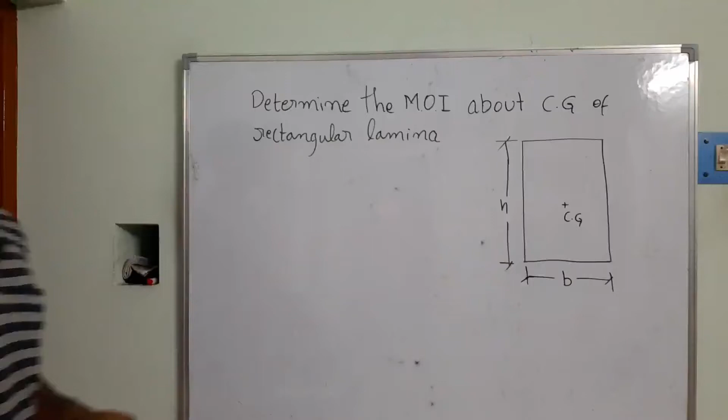In this video lecture, we are trying to learn the moment of inertia for a rectangle lamina. The moment of inertia here is taken for the area, and we know that resistance develops against bending forces. Suppose a body is subjected to bending forces, like a circular member subjected to bending in a certain direction. The cross-section area tries to resist the bending forces. Most of the time, whether it's deformation or deflection of the members, we calculate it using the area moment of inertia.

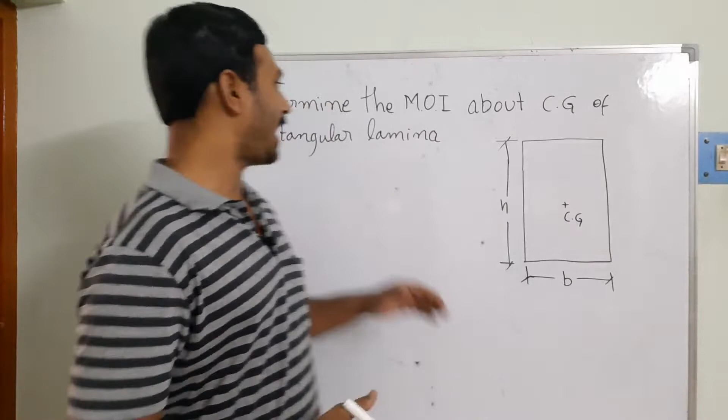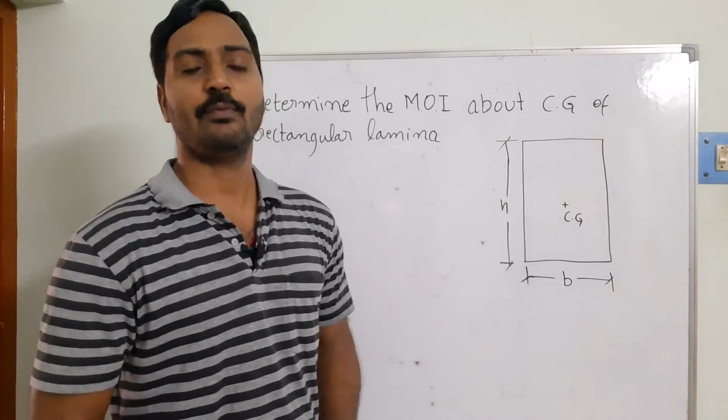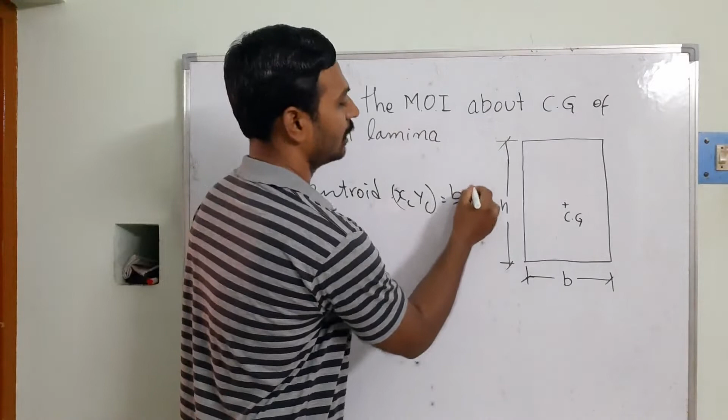In this diagram, we have a rectangle lamina available. The base is B and the height is measured as H. As we calculated the center of gravity in the last video lecture, the centroid of this rectangle lamina, XC comma YC, is equal to B by 2 comma H by 2. On that basis we calculate the centroid.

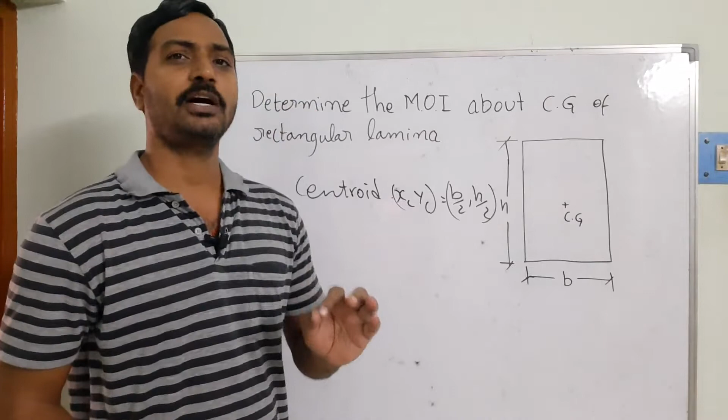Once we calculate the centroid, we need to calculate the moment of inertia with respect to the centroid. So I'm taking the axes over here: this is your X axis and this is your Y axis. Can you see the centroid? Your observation axis is passing through the centroid, both XX and YY.

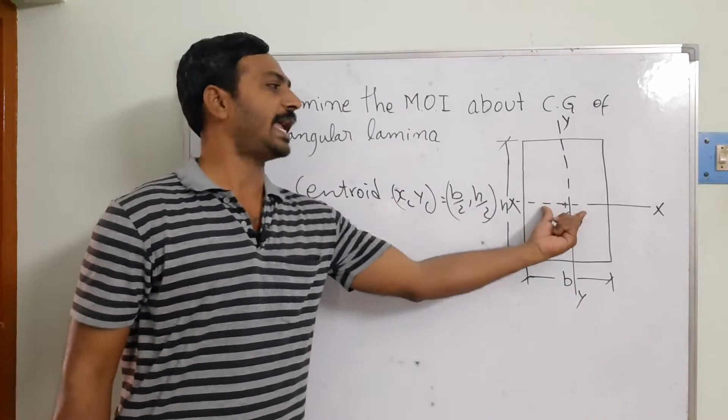Now I want to find the moment of inertia with respect to the X axis. This means, with respect to this axis, how this area is distributed. When it is subjected to a certain type of force, we need to calculate how this area resists the change.

So I'm taking the moment of inertia of this object with respect to the X axis. That is equal to the formula integral y square dA. In this equation, we need to find dA, and for this we first need to find the elemental strip.

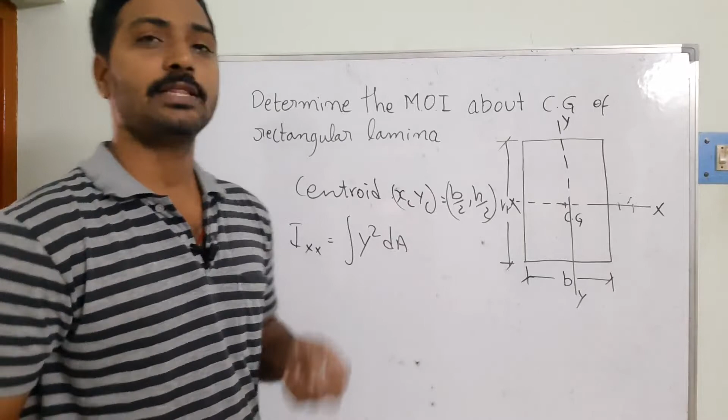The elemental strip is taken parallel to the x-axis. So this is the elemental strip, having a thickness of dy. At the same time, the width of this strip is the same as the base.

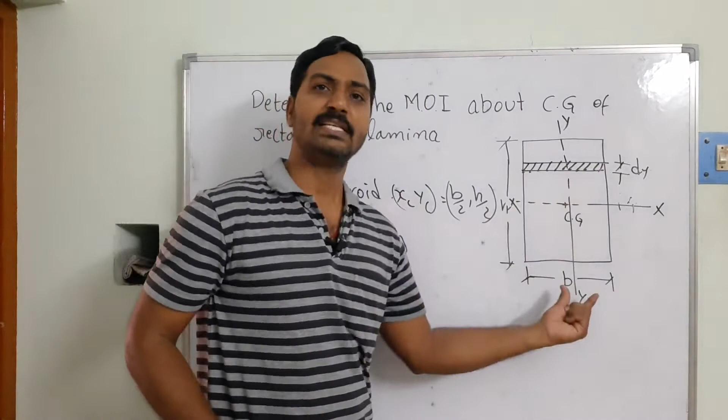So dA, the elemental area, is equal to B into dy.

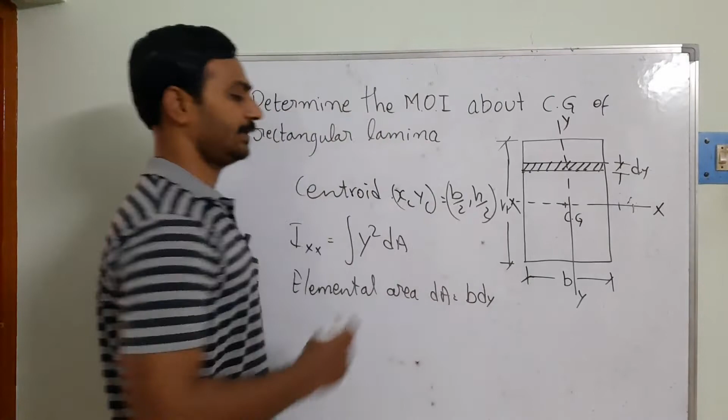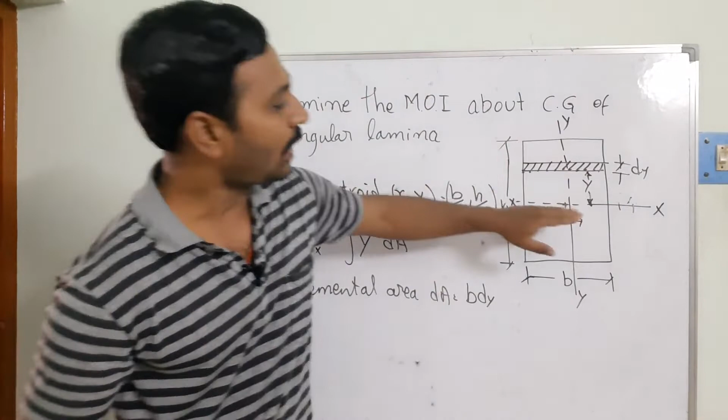At the same time, it is located at a distance of y from the observation axis to the elemental strip. Since the elemental strip is taken above the axis, and the total height is H, y is distributed above and below the reference line. So the limits are minus H by 2 and plus H by 2.

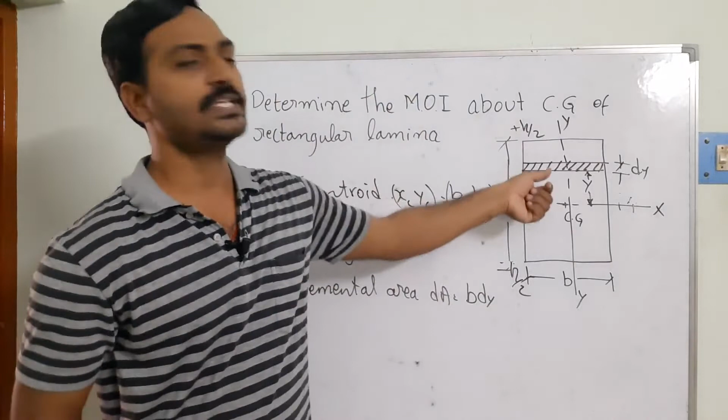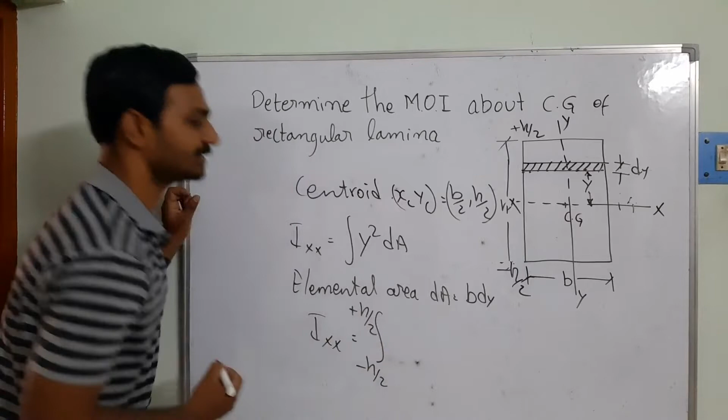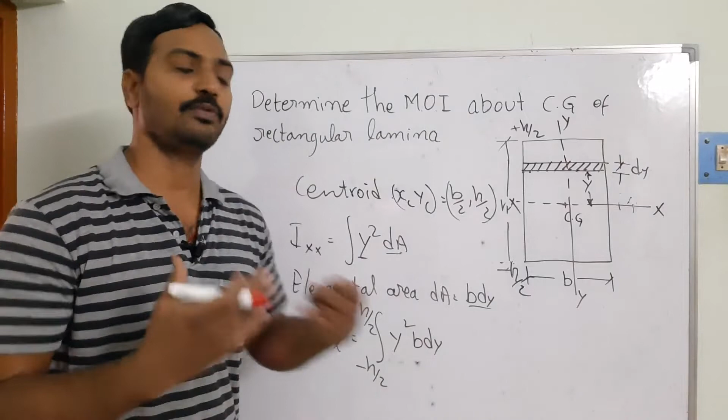Now I'm finding the moment of inertia of this elemental strip. So the equation is: Ixx is equal to the integral from minus H by 2 to plus H by 2 of y square into dA, where dA is replaced with the elemental strip, B into dy. Once we substitute this into the equation, we need to simplify it further so that we can find the resistance area for the bending forces.

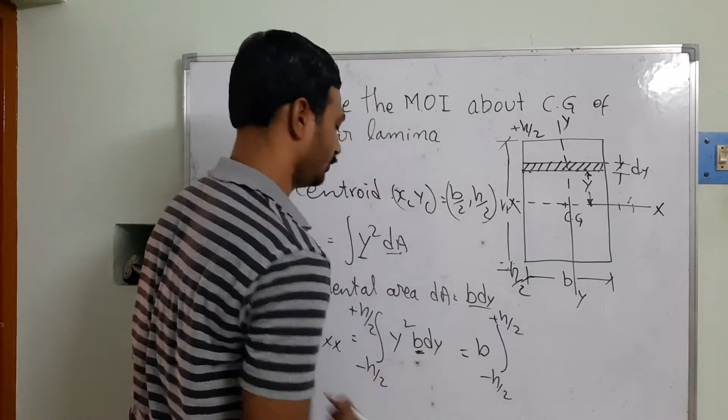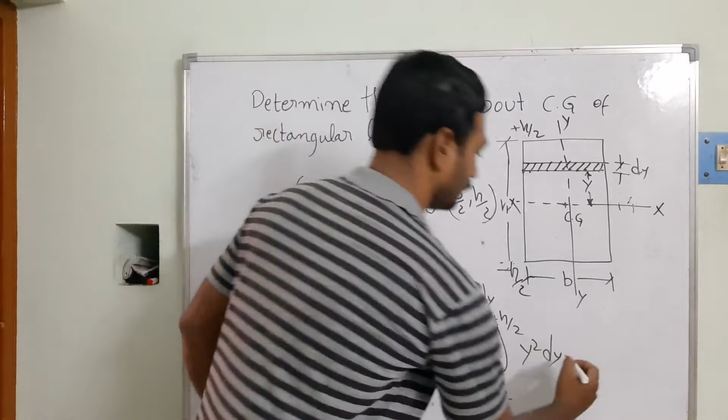So B is going to be constant in this equation, that's the B I am going to take out, and the integral is from minus H by 2 to plus H by 2, that's going to be y square dy we will get it. So from this I am going to be getting B into the integral of y square dy, which gives us y cube by 3.

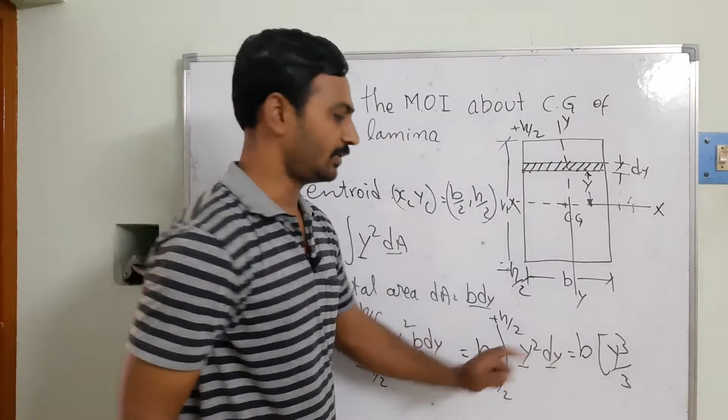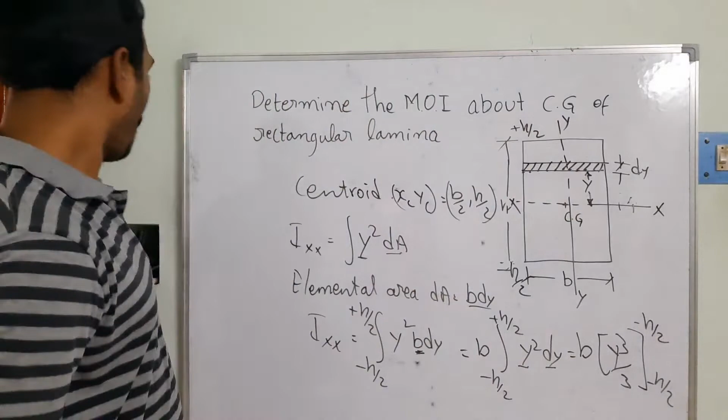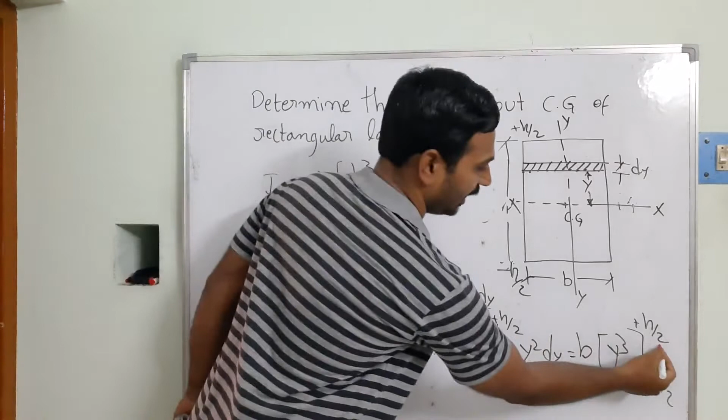So the intervals are going to be varying from H by 2 to minus H by 2. If I substitute these intervals in this equation, I am going to be getting Ixx is equal to B into, so the first interval is plus H by 2, that's going to be H cube by 3 into 8, minus of minus H by 2, whole cube by 3.

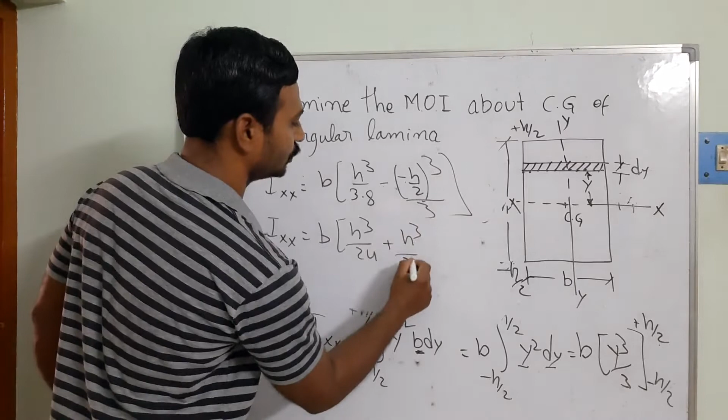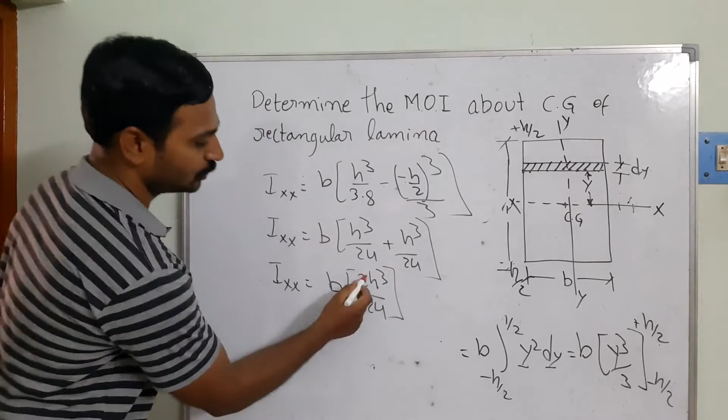Once I simplify this equation, Ixx is equal to B into H cube by 24. Minus minus will become plus, so here is going to be plus H cube by 24. In this case the LCM is going to be the constant, so Ixx is equal to B into 2H cube by 24. Then the 2 divides with the 24, so Ixx is equal to BH cube by 12.

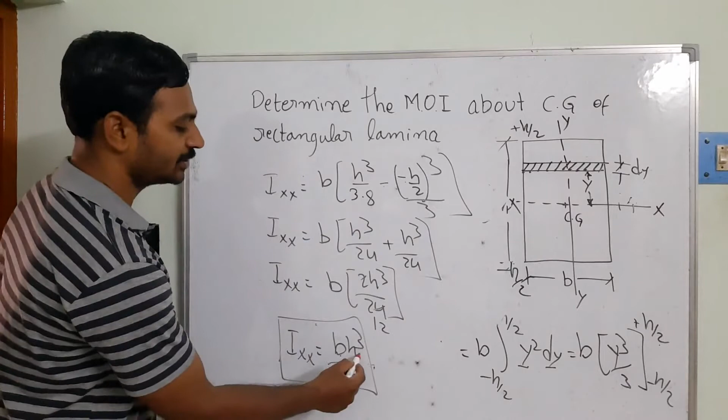So this is the amount of the area where it is going to be resisting the bending forces. Ixx is equal to B into H cube by 12, we got it. I hope you are able to understand how to find the moment of inertia of an area with respect to the centroid. This one we have taken as Ixx.

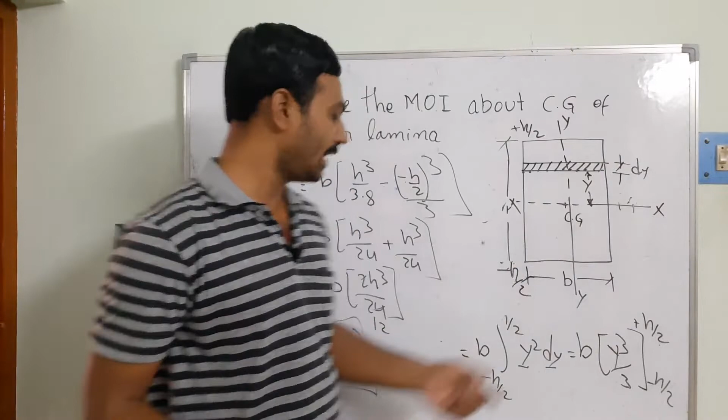Now we are trying to calculate the Iy. If you want to calculate the Iy, we need to take the vertical strip over here so that we can calculate that part.

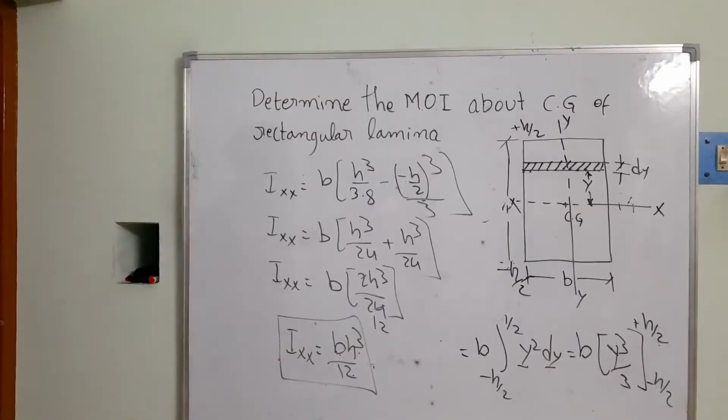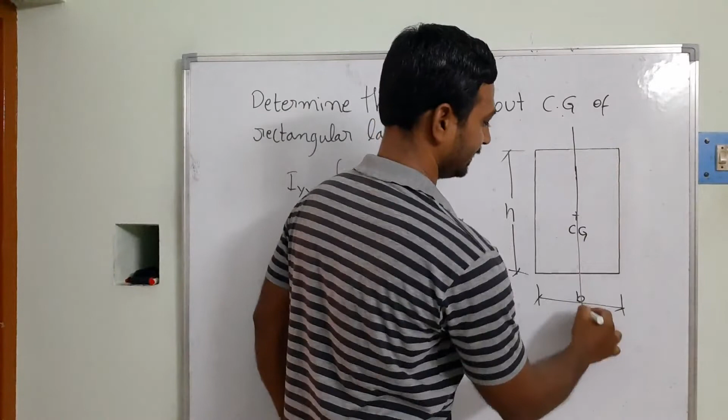Now we are going to find the moment of inertia with respect to the y-axis. Already we told that it is going to be passing through the centroid. So this is going to be your y-axis, and this is going to be your x-axis. Already we have calculated Ixx is equal to bh cube by 12, we have derived the equation. Now I want to find out the Iy, that is equal to integral x square dA.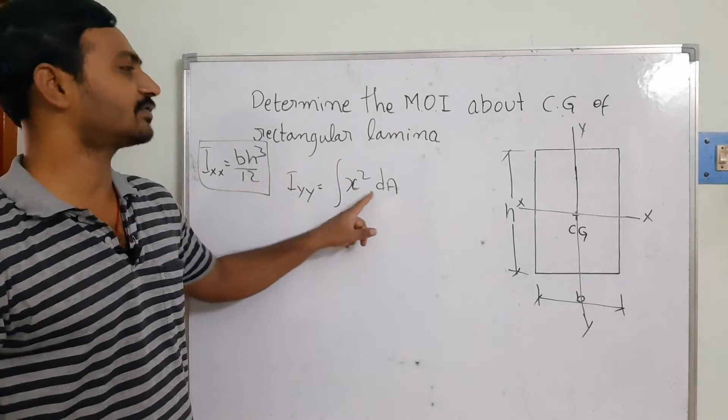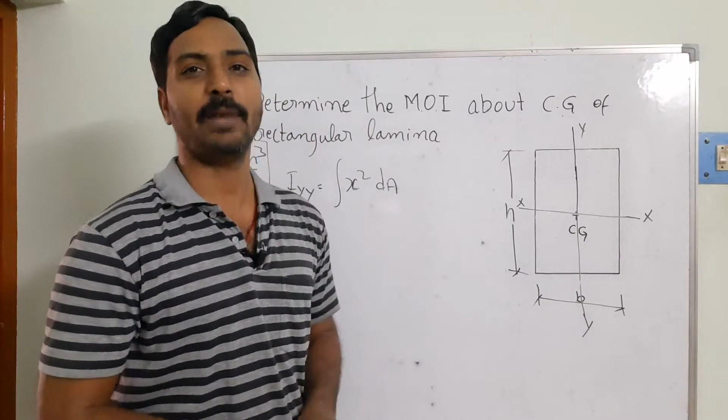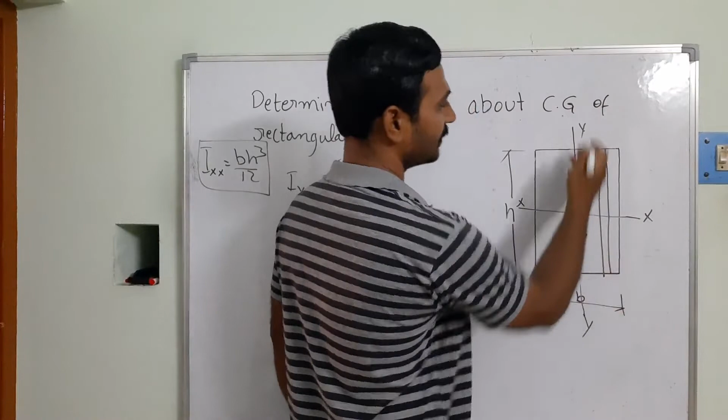To satisfy these conditions, first I am going to take, with respect to this axis, how the area is distributed and how it applies resistance to the bending force. So then I am going to talk about the dA here. The dA is equal to, I am going to take one elemental strip which is parallel to the observation axis. Here your observation axis is the Iyy. So this is your observation axis and this is your dx. So the elemental strip is going to be the dx, and it is located at a distance of x from the y-axis we have taken.

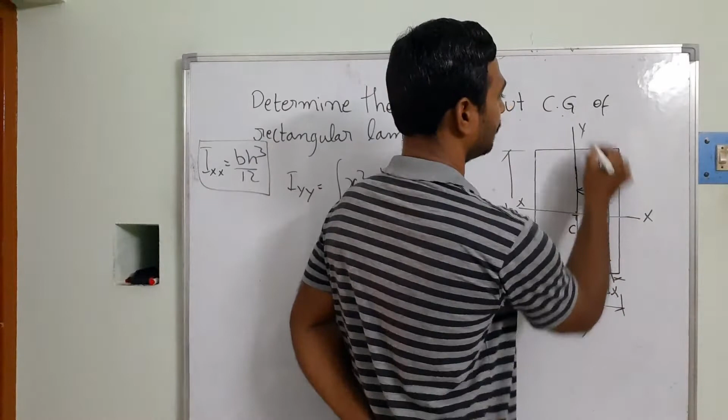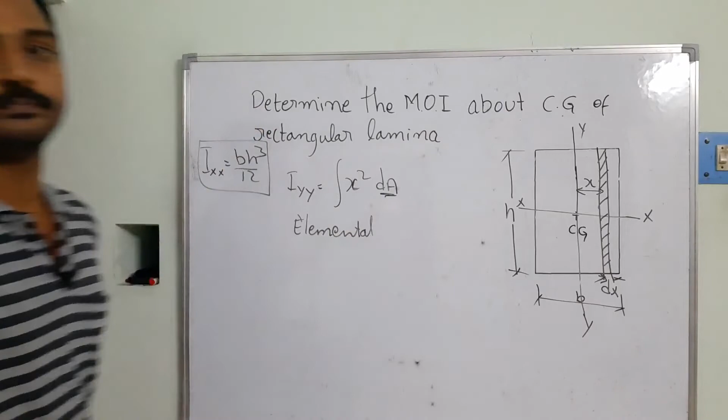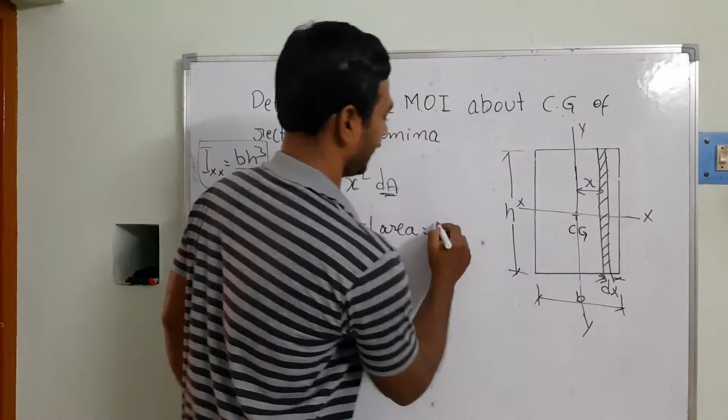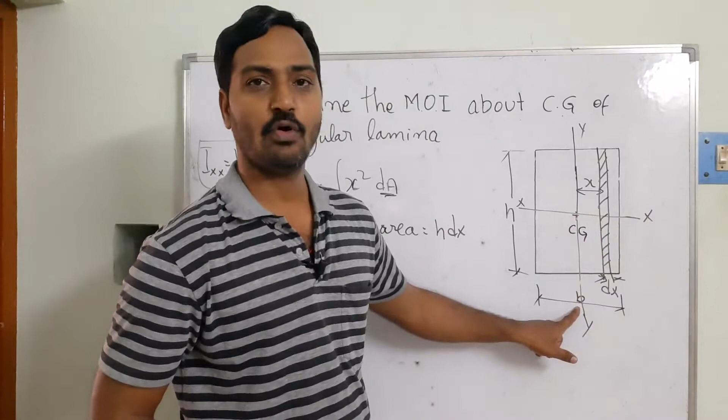Now I am going to find the dA, the elemental area. So here that elemental area is equal to, now in this case it was spread along the length direction, and this is going to be the dx, so I am taking h into dx. Can you see here, the x is moving from the centroid towards the right side and towards the left side. It means that we are using the b coordinates here. So towards the left side is going to be minus b by 2, and towards the right is going to be plus b by 2.

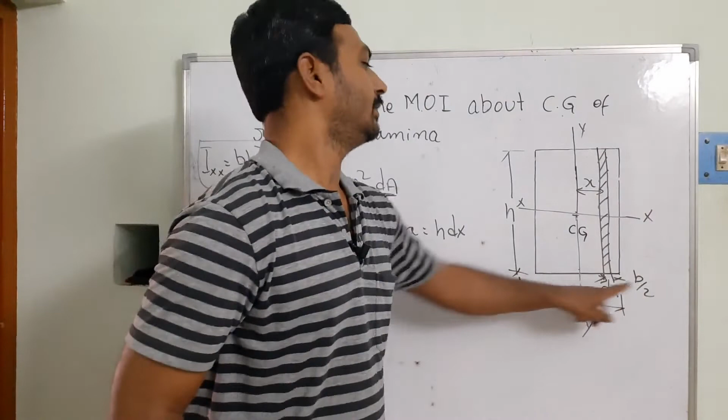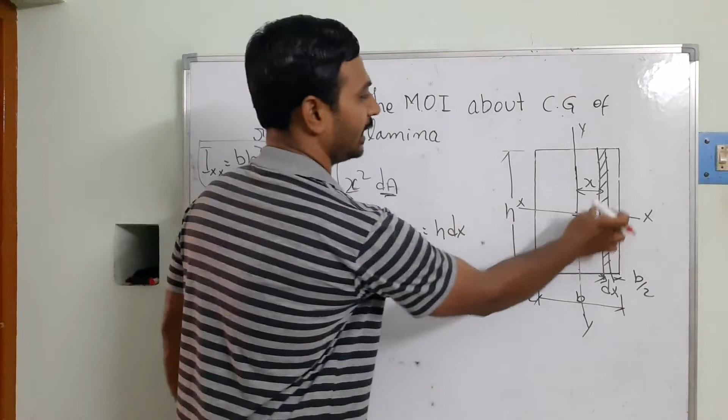So these limits I am going to substitute in our equation. That's going to be Iyy is equal to integral, from minus b by 2 to plus b by 2, of x square, since the element is located at a distance of x, and then the dA I am going to write as h into dx.

Now we are going to be trying to take the constant outside, so I am getting this. So that is equal to, h is going to be the constant, it is not going to be varying. So then your integration is going to be from minus b by 2 to plus b by 2, the limits, of x square dx. Further simplifying this equation, h into x cube by 3 evaluated from minus b by 2 to b by 2.

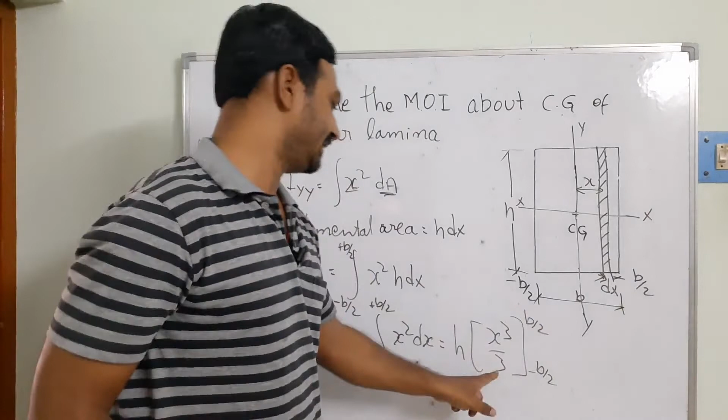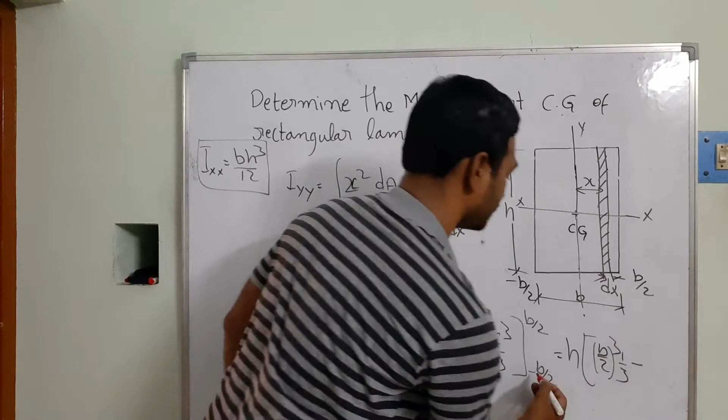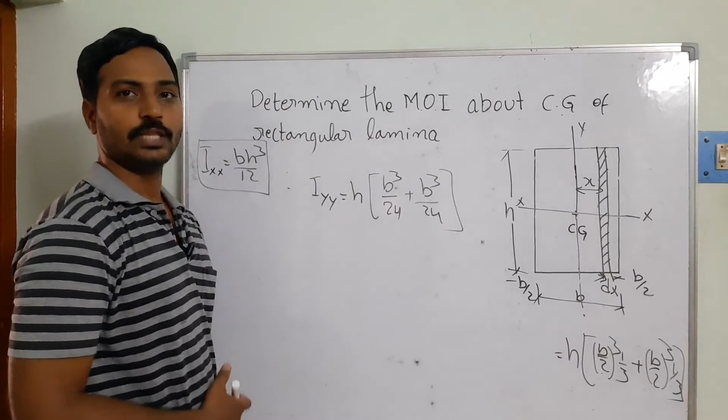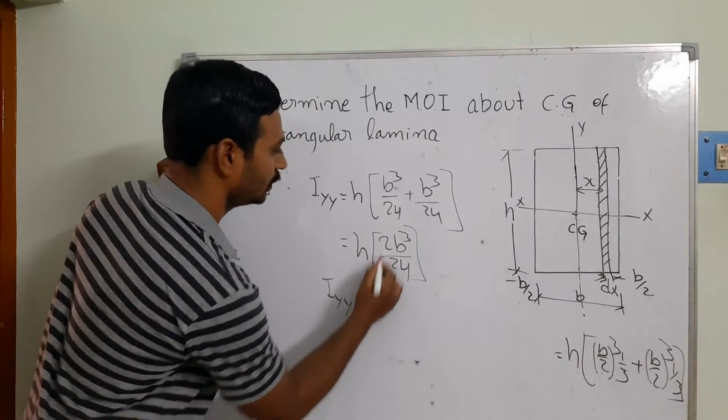So once I simplify that equation, we get Iyy is equal to h into b cube, and the 2 cubed into 3 gives 24. So plus b cube by 24 we are getting after simplification. Then we take the LCM here for simplification, that's going to be 2b cube by 24. So then Iyy is equal to, the 2 divided by 12 we are taking, that's going to be hb cube by 12.

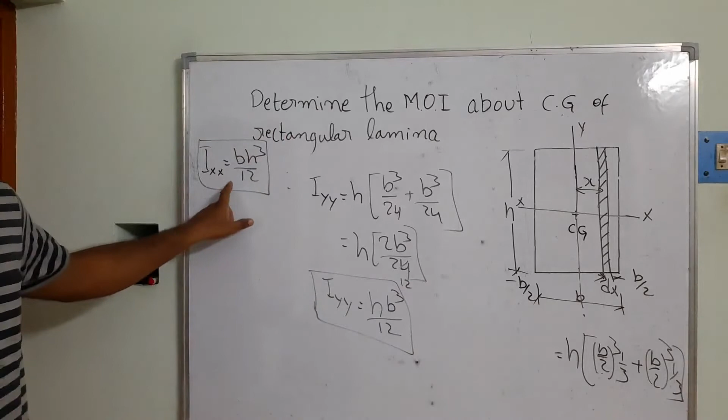We got it. So can you see, Ixx is equal to bh cube by 12, and Iyy is equal to hb cube by 12. So now this is the moment of area where it is going to start showing the resistance, which we will see numerically.

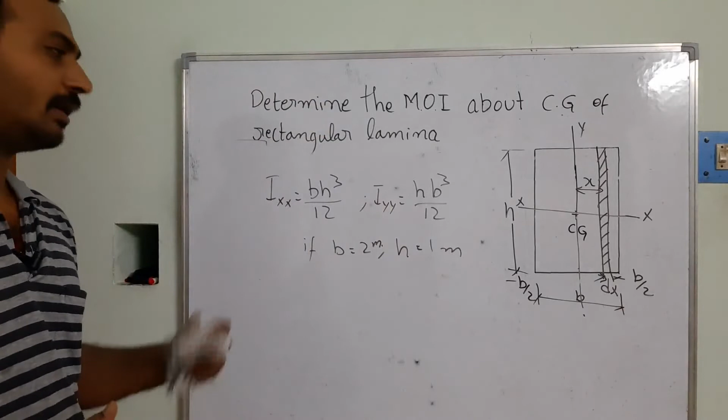So here I am going to be taking the dimensions of B and H. Suppose B is equal to 2 and H is equal to 1 meters, I have taken - either centimeters or millimeters or meters also we can take. For the time being I have taken this one.

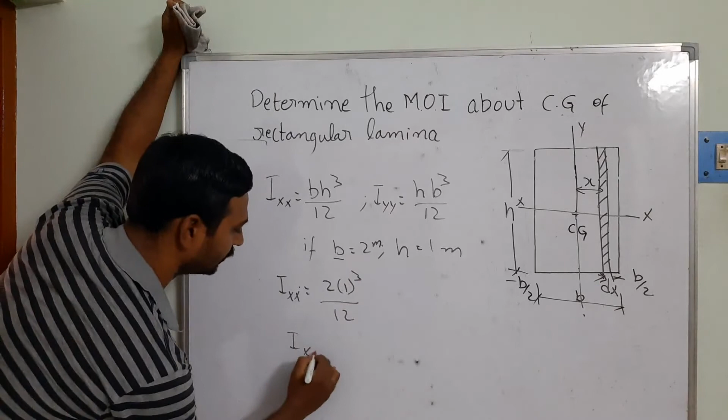So then what will happen? Ixx is equal to, what is the formula? B is equal to 2 and H is equal to 1 cube by 12 we are getting. So then from this, Ixx is equal to 1 by 6 meter to the power of 4 I am getting. So that means 1 by 6 only we are getting here.

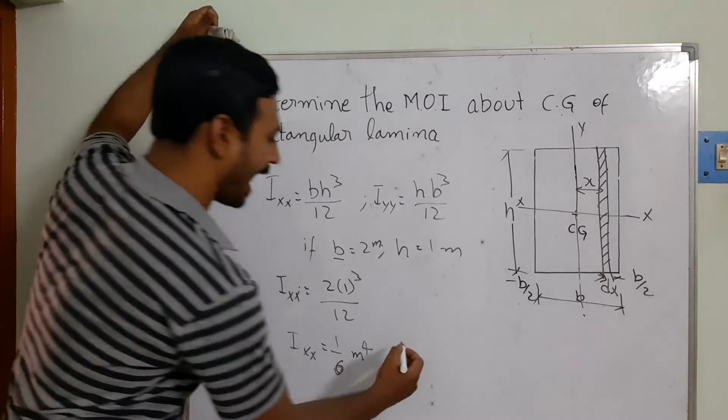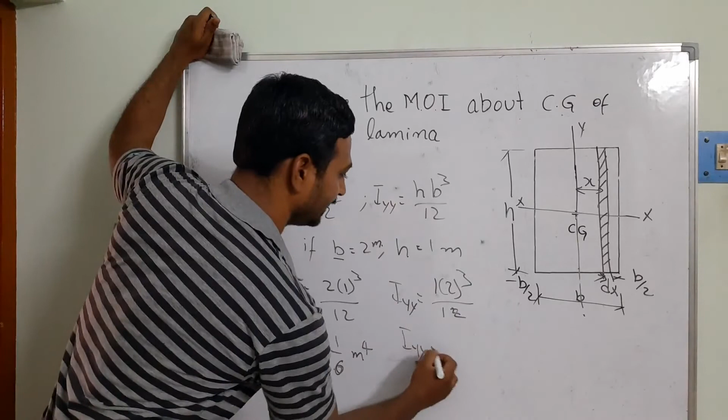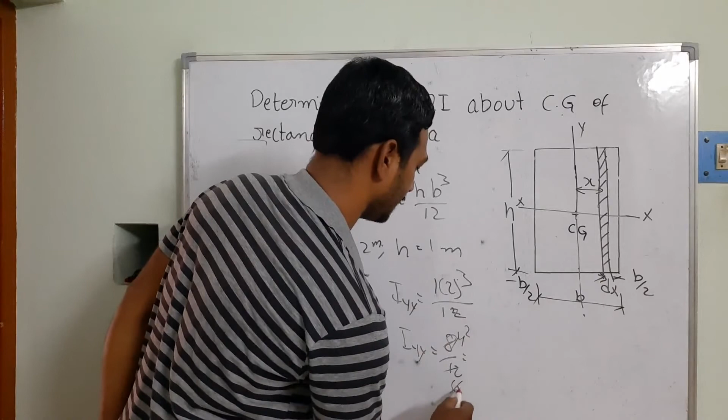Suppose Iyy is equal to, I am substituting in this equation, 1 into 2 to the power of 3 by 12. So in this equation Iyy is equal to, the 2 cubed means 8 by 12 we are getting. So 8 by 12 means this is going to be 4 times, this is going to be 6 times, this is the 2 times and this is the 3. That means finally we are getting 2 by 3.

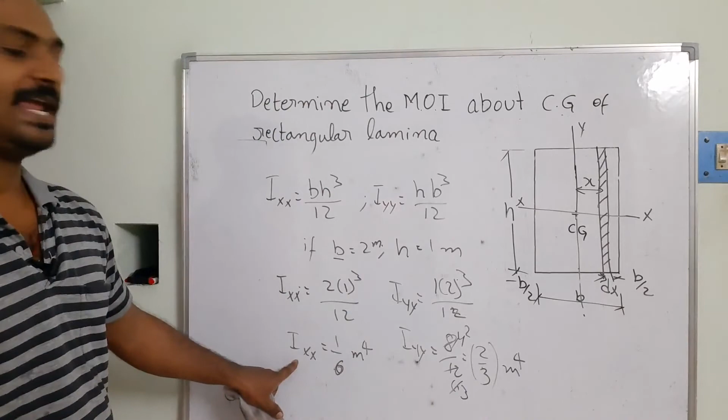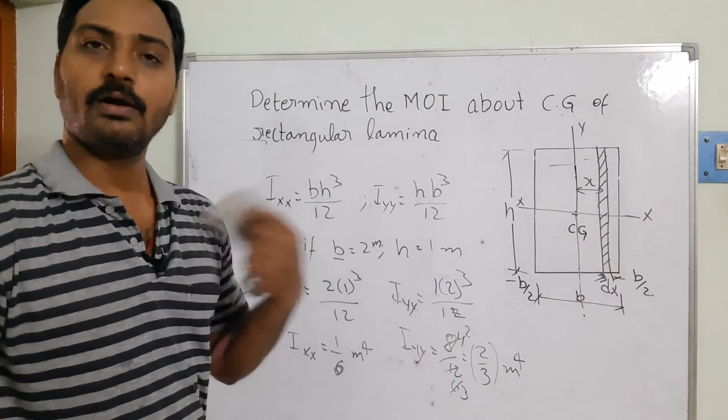So can you see which axis is going to give the maximum? Suppose you can see here, Ixx is equal to 1 by 6 and Iyy is equal to 2 by 3. In this case it is going to be very clear to us. So Iyy has the maximum value compared to your Ixx. So then the resistance is going to be developing with respect to the y-axis. That means with respect to this area, it is going to be applying more resistance. Ixx means in this direction - vertical direction is going to be less compared to the horizontal direction.

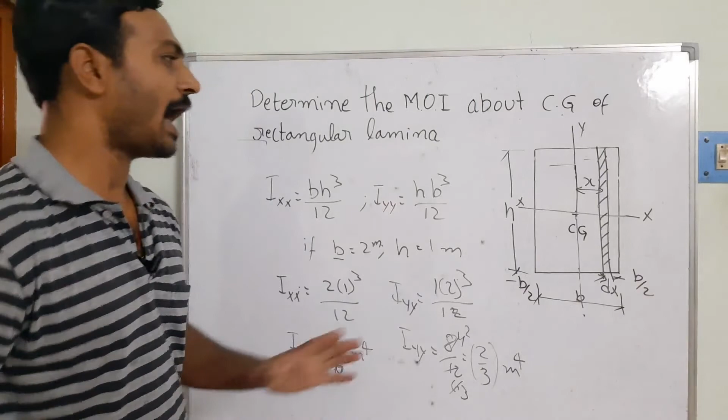I hope you are able to understand this concept and how we are going to calculate the moment of inertia for a rectangular lamina. Suppose we have taken the centroid as our observation point. So then if I take it at the base, we will get another equation over there. So this way we are going to be calculating.